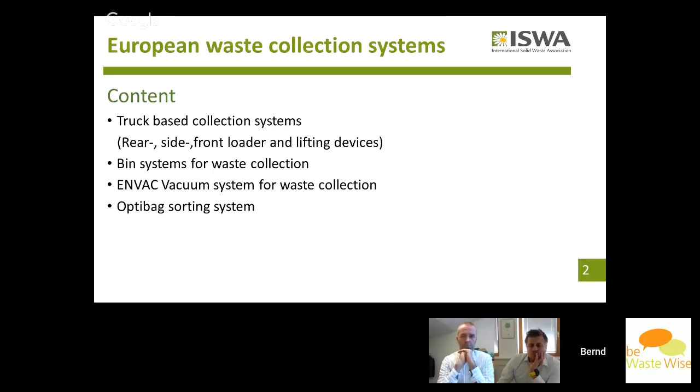First of all, I'd like to show you the most common waste collection vehicle in Europe, our working horse, our standard rear loader. In the back of the body here is a hydraulic-driven compactor installed. The compactor is able to compact the waste with a ratio up to 4:1. That means you can fill a 20 cubic meter body with up to 80 cubic meters of waste. In combination with a low or high level lifting device, which I'll show you later, you can empty all European standard bins up to 1,100 liters, even with bulky waste.

Christian will show you the bin system later on. To empty the body, you have to open the tailgate and empty it by using the pressing shield, driven by a large hydraulic cylinder.

I will show you now the most important advantages of the system from a logistic point of view. The system has a high compaction rate, up to 4:1. It is not so expensive, and most of all, it's suitable for all fractions. You can collect residual waste, bio waste, paper and plastics, and also some other fractions you want to collect. It is even suitable for bulky waste in combination with a low-level lifter.

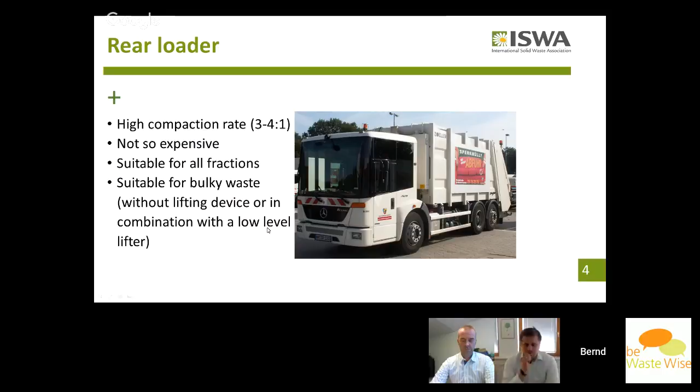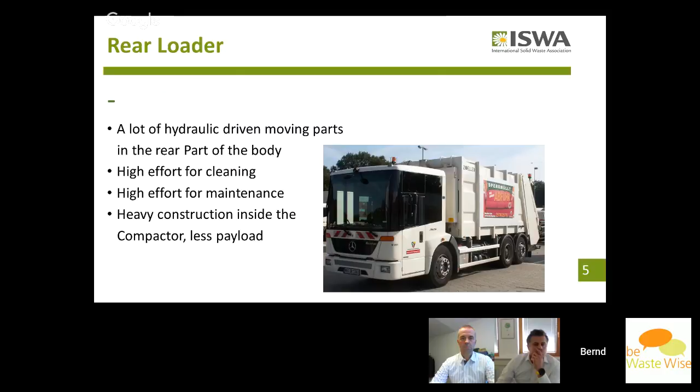I'll show you later. The disadvantage of the system is that you have a lot of hydraulic-driven moving parts in the rear part of the body. There are a lot of hidden corners you have to clean, so the effort for cleaning is very high. You have a high effort for maintenance, and you have a heavy construction inside the compactor that causes less payload.

There is a special rear loader available in Germany, the rotating drum system.

We have only one manufacturer for that in Europe because the system is patented. The body is driven by a hydraulic engine, rotating clockwise and moving the waste using inner guiding rails forward.

When the drum gets filled up, the waste comes in contact with the pressing cone at the back of the body, causing compaction. The body is excellent for bio-waste collection because the rotation of the drum means you have no problem with water and other liquids. The back of the body is easy to seal, so nothing comes out. To empty the body, you open the back and turn the body counterclockwise.

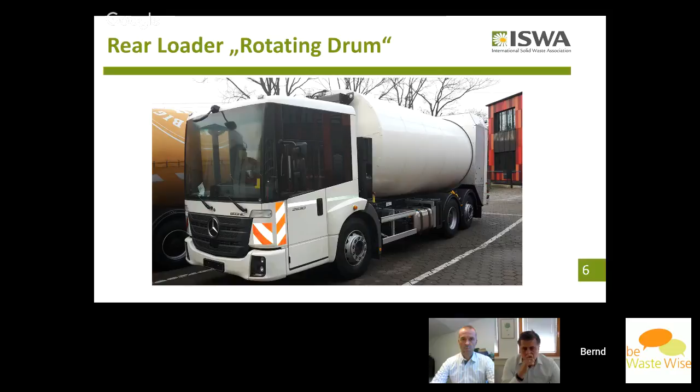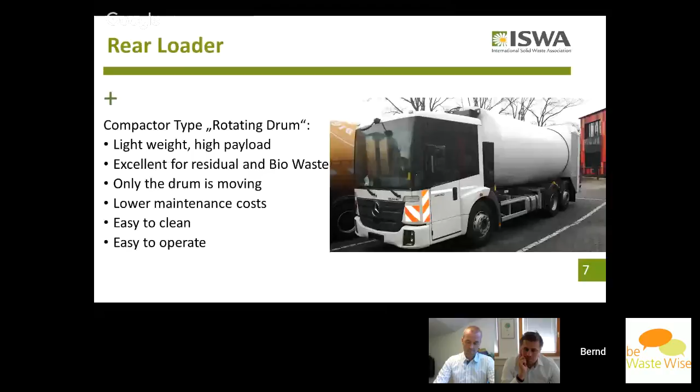The advantages of the rotating drum are that it's lightweight and therefore has a high payload. It is excellent for residual and bio-waste. Only the drum is moving, no other moving parts are in there. You have lower maintenance cost, it's easy to clean, and easy to operate.

The disadvantages are a little bit the price, it is a little more expensive. You have a lower compaction rate, up to 3:1. It is not suitable for paper collection and not suitable for packaging collection.

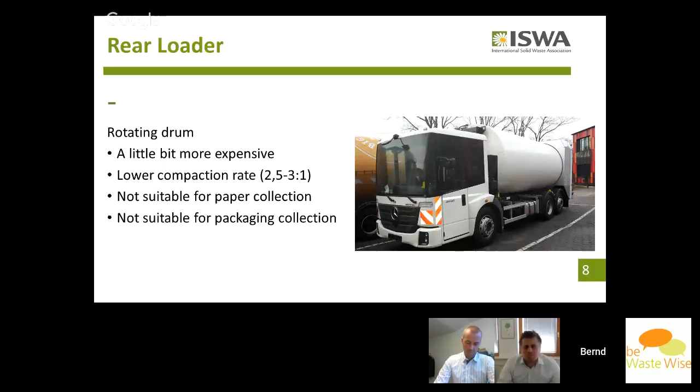One of the most important advantages of this one is, in combination with a steered rear axle, the vehicle is easy to operate in narrow areas, as you see it on the picture.

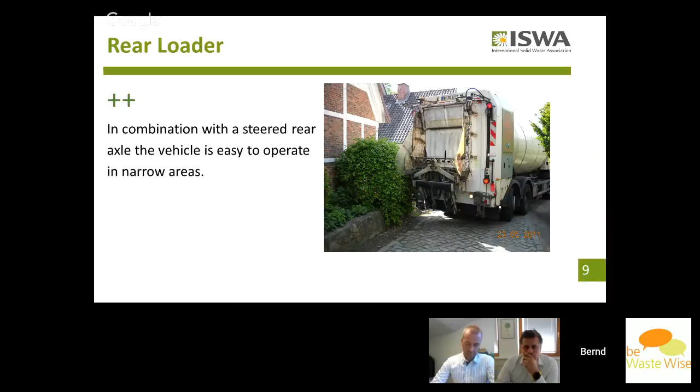For the rear loaders, we have different types of lifters available. The standard lifting device is the high-level lifter with a mounting frame according to the European norm.

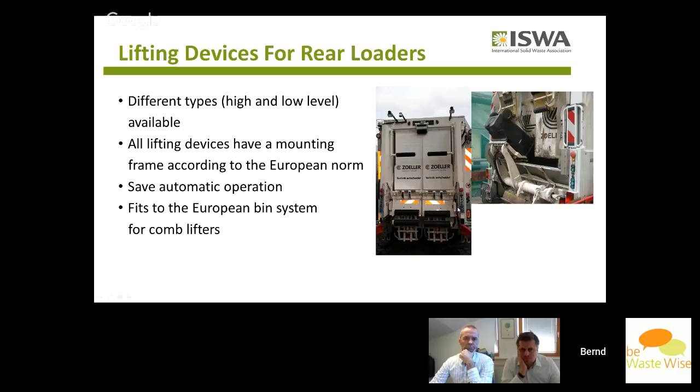The next type we're talking about is the side loader. There are different types of side loaders and lifting devices for side loaders available in Europe. We decided in our company to use the side loader with a rubber bracket here.

So we can use the lifting device for any kinds of two-wheel bins, and it doesn't matter how it is placed at the curbside. When the collection area is optimally designed, you can lift up to 190 bins per hour with such a system. It is very easy to operate.

If you want to lift four-wheel bins too, you have to choose a side loader with a comb lifter. Such a lifting device causes more weight and reduces the payload and loading speed. To empty the bin, you tip the waste into the very simple compactor at the front, located between the cab and the body. To empty the body, you open the back and tip it.

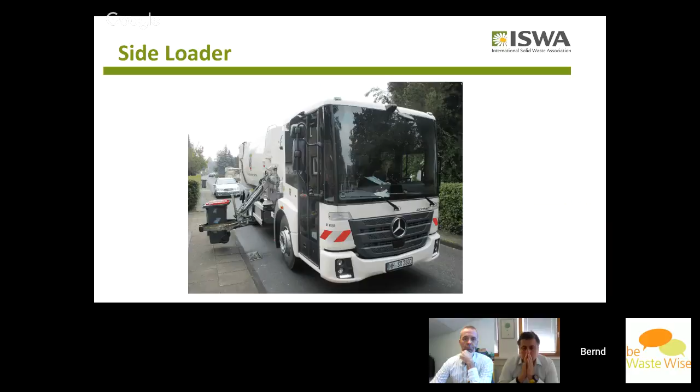The advantages of the side loader are single driver operation for curbside collection, making it very effective and fast. You have a high payload due to the lightweight body. It is suitable for residual and bio-waste collection, and it is very easy in bin handling.

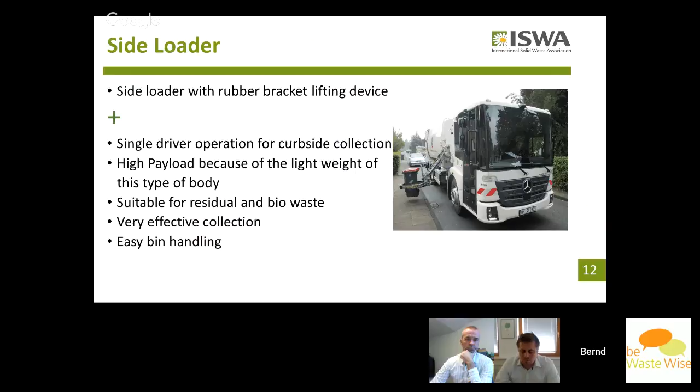The disadvantages are that the body is very expensive. You have higher costs for maintenance because you have a lot of moving parts in the lifter, and a lot of electronic devices to control the lifting device. It is not suitable for collection of paper and packaging materials.

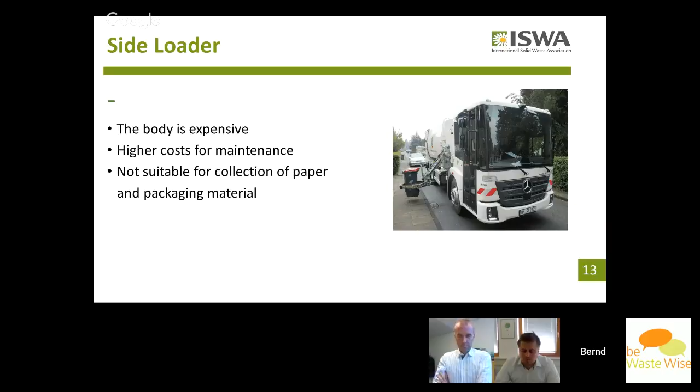On the front loader: front loaders are special trucks for pocket containers without wheels, with a volume of 3.5 up to 4.5 cubic meters according to the European standard, up to 6.5 cubic meters according to the standard of two German manufacturers.

It is normally used to dispose of commercial waste, but it's also used to collect all fractions at collection points where curbside collection is not possible. You can empty the container by using the hydraulic forklift at the front. The lifting device tips the waste into the compactor in the front of the body. Similar to the side loader, to empty the body, you have to open the back and tip it.

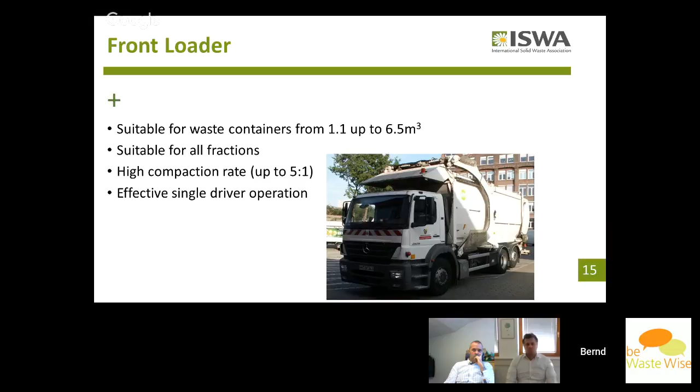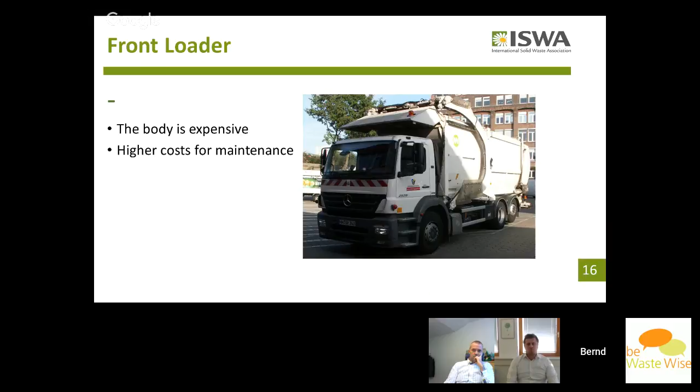The advantages of these systems are it is suitable for waste containers from 1.1 up to 6.5 cubic meters, and it is suitable for all fractions. It has a high compaction rate up to 5 to 1, and a very effective single driver operation. The disadvantages are the price. The body is very expensive, and you have a higher cost of maintenance because of the lots of moving parts in this kind of truck. That's all, thank you for your attention.

Christian, could you unmute yourself and then introduce yourself and start your presentation, please? Yeah, okay, one second. Let me share my screen. Can you see my full screen? Yeah, we can see it. Okay, welcome everyone. Hide the button there at the bottom. Again? No, actually go ahead. Please go ahead, good.

So welcome everybody, also from my side. My name is Christian Rehmer. I'm the managing director of a company within the SSI Schäfer Group and responsible for all digital solutions of SSI Schäfer for the waste industry. For those who do not know who Schäfer is, SSI Schäfer is the world's leading provider of products and systems for intra-company material flows, but also, and that's my role, waste engineering. We have in total 70 companies worldwide and more than 10 production sites. We develop innovative concepts for our customers and the relevant industries, and our target is to shape the intralogistics, but also the processes in waste management. So what I'm talking about today is bin and container systems. That's my topic.

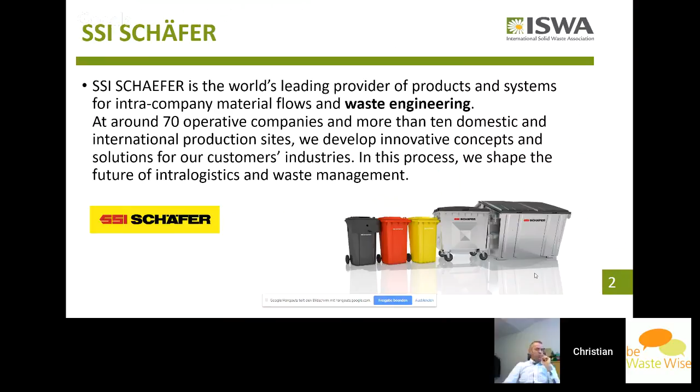First of all, I think many of you already know which type of general container systems are available on the markets. I will not go into details with regard to swapping container systems, which means I only focus on tipping systems where the container stays at the place where it's emptied. So in general, we can divide into 5 general groups of containers, starting with the very typical 2-wheel bins, which are mainly used for curbside collection, the house-to-house collection systems where the resident puts the waste into the specific wheelie bins. The same system applies to 4-wheel containers, which are available in steel or plastic.

The next system, which is quite common in Europe, or actually in Germany, are depot containers, which means these containers are placed within living areas or on the streets, curbsides, and are used as bring systems for recycling materials, for example paper, glass, etc. The 4th container system is the front-loading system, which also fits to the last truck which Bernd has just shown to us. These containers are mainly used for industrial collection systems, so industrial waste collection.

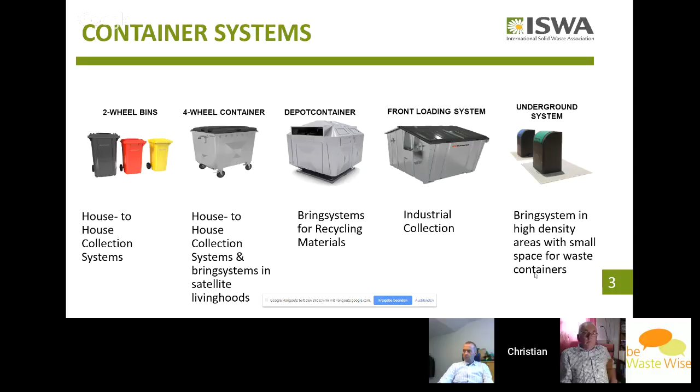The last, and probably also the most complex system, is underground systems, where you can only see a very small part of the entire container system overground, like an iceberg, and roughly 5 cubic meter containers are in the ground. These systems are mainly used for bring systems in high density areas where we have only small space for waste containers to be placed on the surface.

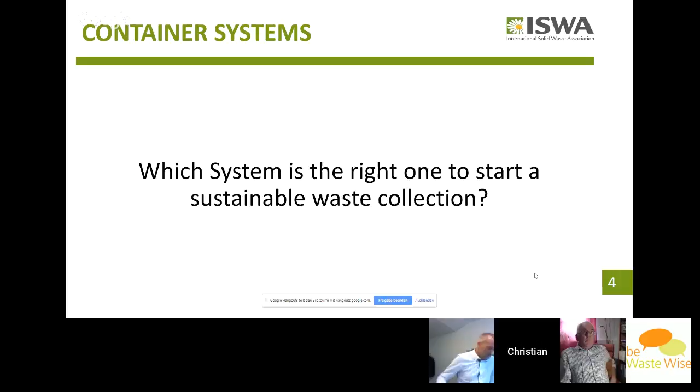So the question is, which system is the right one to start a sustainable waste collection in my area? For this, I would like to go into some sideways, having a look at the people living in cities. So some mega trends: in the 1980s, we had 39% of the world population living in cities. In 2012, it was already 51%, and it's expected that 69% of the world population in 2050 will be living in cities. Especially mega cities is a big topic, where we have, for example in 2020, more than 100 cities in China with a population of at least 1 million. This has an impact on increasing income as well.

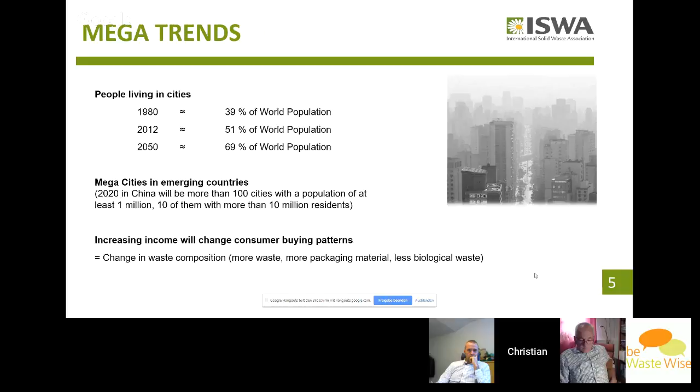So the change in waste composition - the waste composition will change in the next years, which means we have more waste, more packaging material, but less biological waste. So we have more material streams. This is causing a couple of facts, or resulting in a couple of facts. We have increasing demand for resources, and we have the demand that material recycling is absolutely necessary.

Material recycling at the end reduces CO2 emissions, and we have to be aware that waste to energy is only a one-time use of resources. So it should be material recycling, not waste to energy.

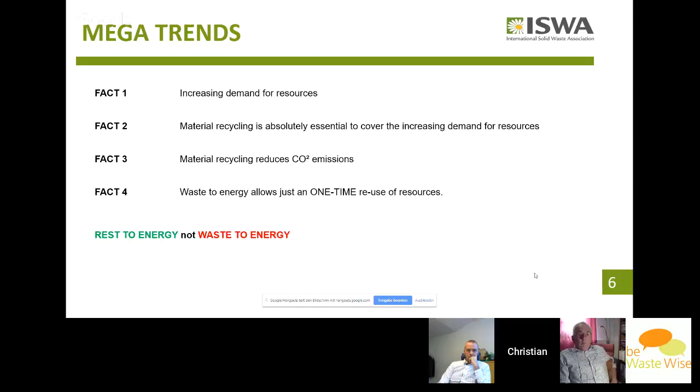This is something we have managed in Germany quite well. We have decoupled the raw material consumption from the welfare, which means the welfare is going up in emerging markets, but the environmental impact has to go down at the same time.

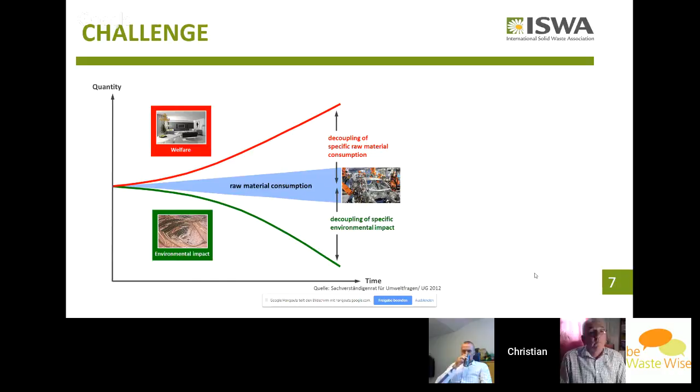What have we achieved in Germany? Having a look at the waste composition over the last years: in 1990, we had 87% of really refuse and rest waste, which has been burned or dumped into dump sites, and only 13% of recycling material.

By 2004, we had already cut the rest or refuse materials in half. At the same time, we raised the recycling quota to 58%. And in 2015, we had only 37% of material which has been burned or was rest material, and 63% of all waste had been recycled in Germany.

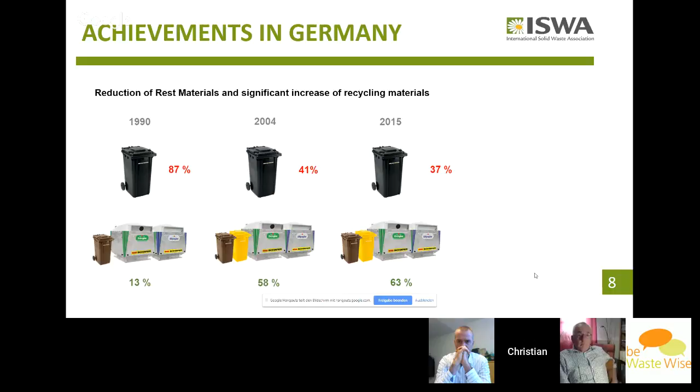This results in a couple of solutions for bin systems. I will show you two systems today: on the one hand, the 2-bin system, but also the 3-bin system, talking about the curbside collection. For example, in the 2-bin system, you have two ways for the material.

The dry waste bin, which you first sort to get recyclables out, and the rest is something which you burn, and after burning you dump, for example, ashes. For the wet waste material coming from the second bin, you use processes like fermentation or composting, and you get biogas and energy, but also compost for the farming industry.

The 3-bin system is a little bit more complex: you have only recyclables in the dry bin, the same process as before. You have only rest and refuse waste in the second bin, and you have wet waste in the third bin, which you can process at the end in the same ways as in the two-bin system.

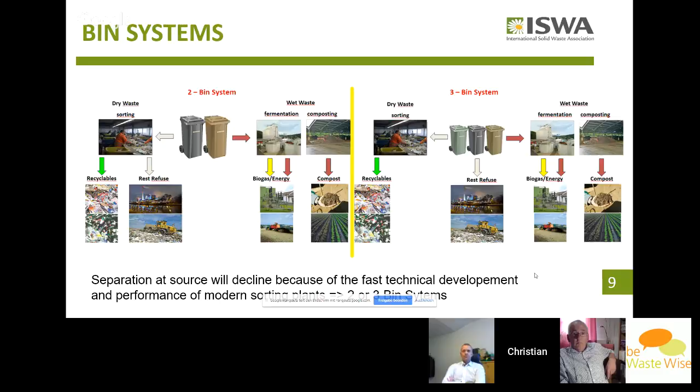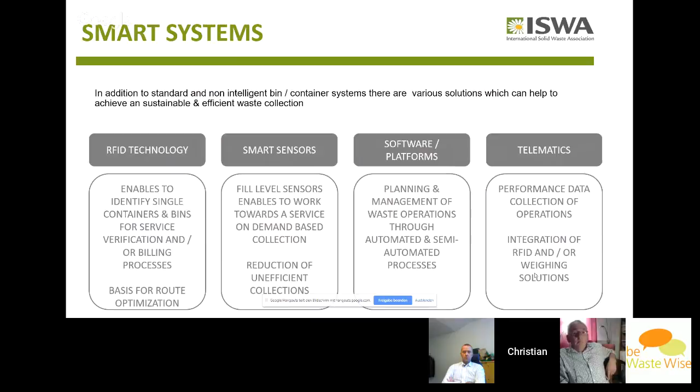Coming to surrounding systems: after you have implemented bin systems, they are not alone. You can also make a non-intelligent bin or container system intelligent through various technologies. For example, RFID technology enables identification of single containers and bins for service verification or even billing processes, and RFID can be the basis for route optimization.

Smart sensors, which go into depot containers, like fill level sensors, enable a service on-demand-based collection, and this helps reduce inefficient collection processes. Software platforms support the planning and management of waste operations through automated or semi-automated processes, enabling efficient collection and control over everything.

You need telematics on board, which gives you the performance data of the trucks. And for these trucks and telematics, you also integrate RFID and/or weighing solutions.

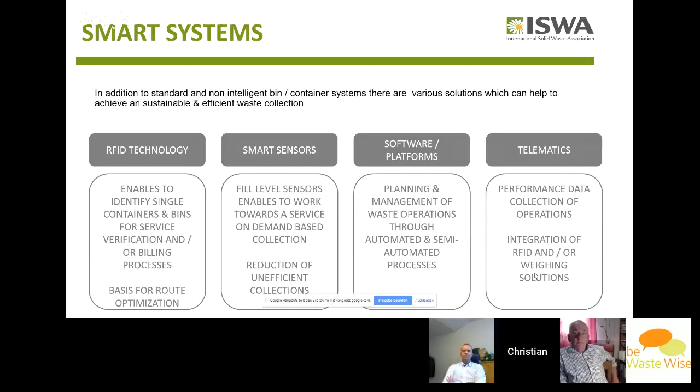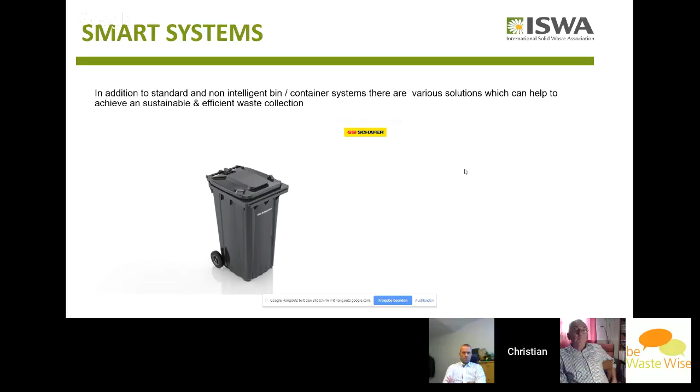Just to give you an example of how an RFID could look like, this is... it doesn't work. No, it doesn't work. Sorry, I had planned to show you a video, but it doesn't work obviously, so I'll just switch this slide, which is only showing RFID.

So how could a target scenario look like for bin and container systems? Separating everything: in the field you have depot or underground containers for recycling materials, like glass, enabled with smart technologies like fill level sensors to operate efficiently. Citizens and industry have bins with RFID and clear identification of collections.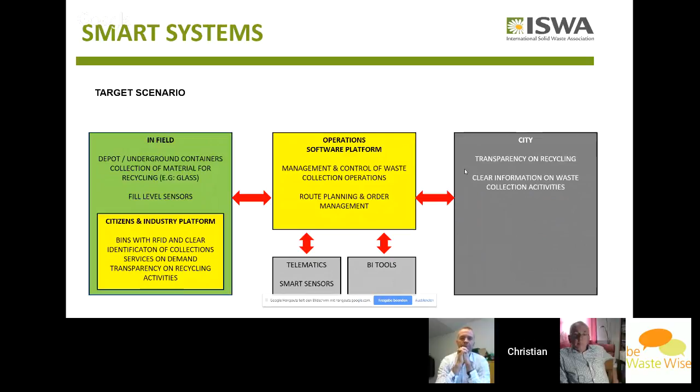In the middle, you have operations software solutions for route planning and order management. But at the end, very importantly, the city is also involved with transparency on recycling -- they have clear information on waste collection activities. This gives a whole picture of collection systems with containers.

How do I introduce sustainable container systems in three phases? First of all, from our perspective, you should do a basic analytics: how many people are living in the region you're targeting, what is the geography, what is the living density, to understand the basics of how many people, streets, cities, etc.

After this, you should do, from our perspective, a definition of which materials shall be separated. It is the waste stream definition - how do I want to split my entire waste up?

At the end, they can start with a cost and revenue stream calculation of different scenarios and also with different technologies, depending on what you want to achieve. This is really a case-to-case solution. There's no global solution for which container systems or bin systems can be used. It depends on what shall be achieved and which level of separation or segregation you are in already.

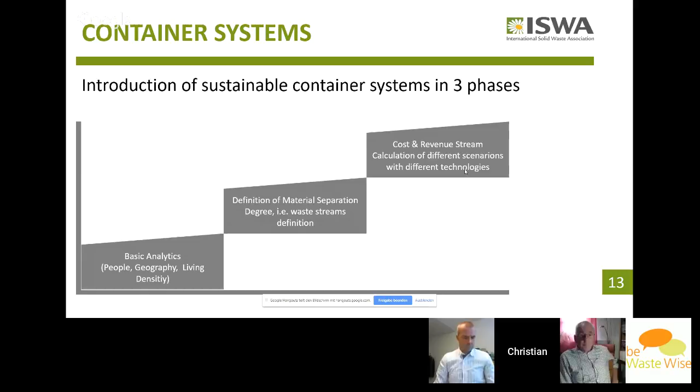I work for a company called Envac. We are located in Stockholm, Sweden, so we're a Swedish company, and we're also in the business of waste collection systems. However, our approach is slightly different to the two presentations you just have seen, because our product is based on an underground waste transport system, and I'll walk you through that technology in my slides.

Just to give you some idea of who we are - we are quite an unknown company, but we are actually world leader in these automated waste collection systems. We have offices all over the world. Main markets are, of course, the Asian markets as well as the Middle East, where a lot of city developments are happening. And I fully agree with what Christian has said.

The increase of populations in cities that will happen in the future will, of course, pose enormous demands on the waste collection systems in those areas. And we believe that our technology is quite attractive for certain areas. I don't want to say for everything, because there is no one solution that solves everything, but we do have an idea of where our product can make quite a big difference.

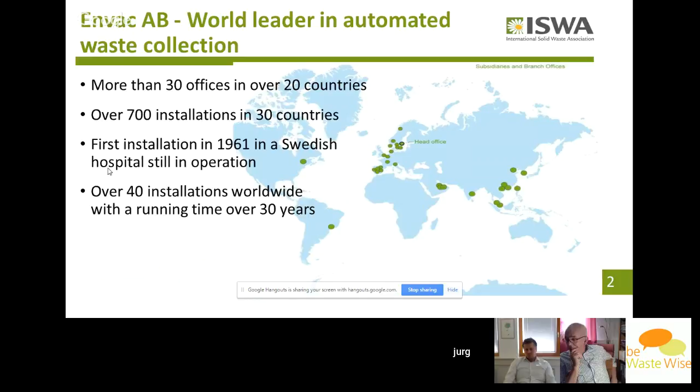Our strategic mission is we want to bring value to our customers, and you do that by delivering systems that work efficiently and cost effectively, and where every participating partner is also getting a benefit from it. That benefit may be a money-wise issue, it may be increased performance, it may be increased living quality, and we think that our technology fits quite well into these criteria.

Now, what is it all about? Basically, our idea is that users - and in this picture, an example from a residential area - take their waste to these so-called waste inlets, which is basically a tube that sticks out of the ground. Underneath this tube, you have a certain collection volume where you can put your waste in.

By sensor technology, we know how much waste is in these tubes. Whenever those are overfull, or before they get overfilled, we empty them by opening a valve at the bottom. The waste fraction falls into this large pipe in the ground. Then by evacuating this pipe system, we create a vacuum. Then we open this hatch, you get a gust of air, and this gust of air transports the waste into a centralized terminal.

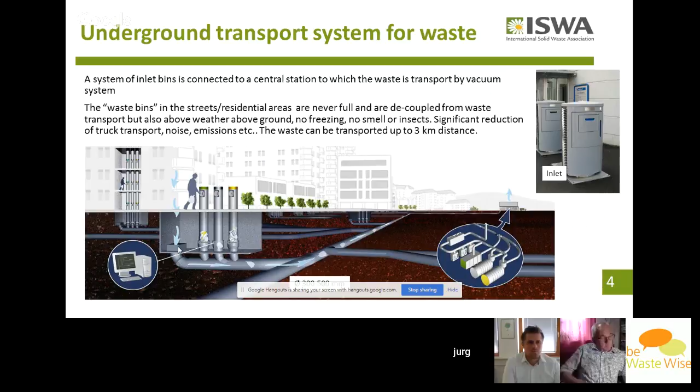I'll show you a couple of pictures of how these inlets may look like. We have all kinds of different architectural designs, always depending on what our clients, our customers would want to have in their city picture.

This big one here on the right-hand side is a relatively new design we have, which we use for small carton and packaging material. Due to Amazon, Zalando and these type of online shipping companies, the amount of packaging material found in waste streams has increased dramatically in the last two years. Carton boxes are very voluminous, they don't weigh much, but it's a very good resource to be reused. So we want to make sure we can offer technology to collect carton and small carton packaging boxes with our system.

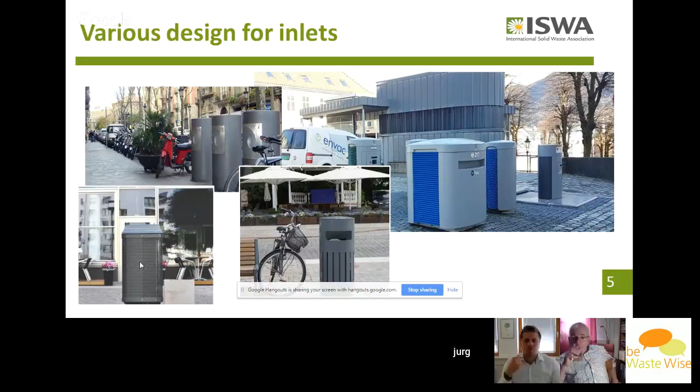You have these other types of cylinder or square systems that look pretty much like a normal waste bin you'd see in any city. The real technology of these is actually underground, and you don't see that.

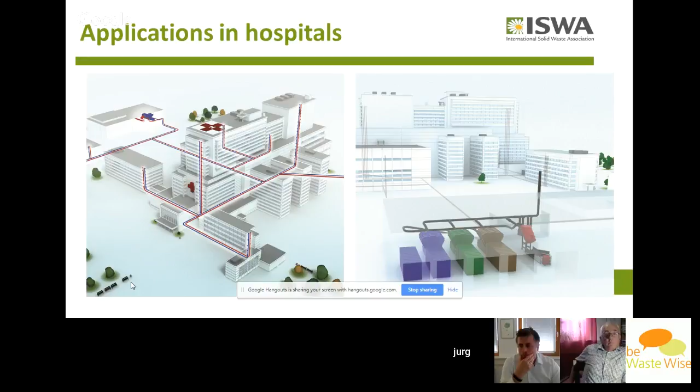One of the applications we have with this system is also a hospital area, where you of course have certain types of waste streams. It's the same application here - we have inlets in the walls or in the hallways of these hospital floors, and from there we suck the waste using the exact same vacuum technology to a centralized terminal, from where the waste can be collected and treated separately, depending on what fraction you have.

What we see as an advantage for hospitals with the Envac system is that, without it, you need space on every floor of a hospital for storing waste - intermediate storage. Now that storage room is much better used as a patient room, operation room, or whatever rooms you need in your hospital. So there's more room available for care.

You can actually have a narrower corridor - you'd need a wider corridor with a waste bin system. You also need to transport waste from these intermediate storages down normally into the basement, which would mean transporting waste and possibly contaminated material in an elevator that may also be used for other purposes. So you increase cross-contamination risk.

By removing the waste from the public area, so to say, and moving it through a vacuum system, which is a sealed pipe, you reduce this cross-contamination risk quite dramatically. You also increase, I wouldn't say the living quality of the hospital, but certainly the working quality of the staff by getting the waste out as soon as possible. We think this is a very good application for this system.

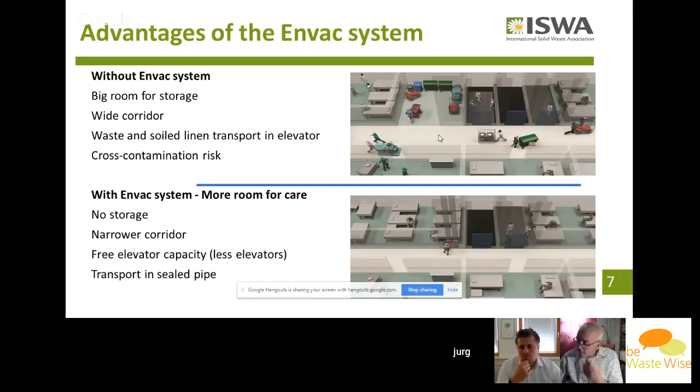Another aspect which is quite nasty and not very nice to know about is pest control in hospitals. Again, it's an area with a high infectious risk where a lot of organic material is available, which attracts pests. By reducing the amount of organic material available through an Envac system, you also reduce the access to that material by rats and similar pests.

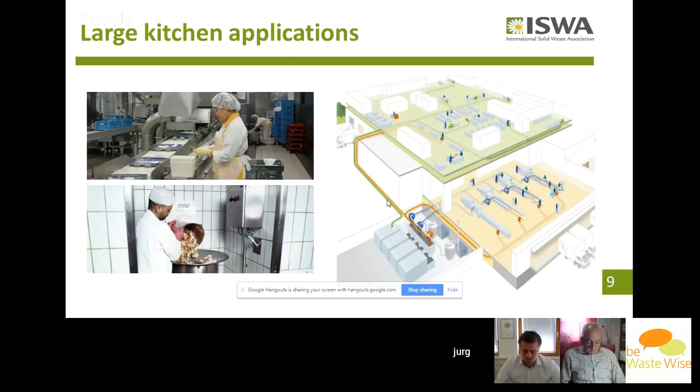Another application area we have for our system is large kitchens - that may very well be a kitchen of a big hospital, or maybe a centralized kitchen in an airport system, where you can have a set of various food waste inlets distributed all over the large kitchen, from where it would be sucked away into a centralized terminal. So we combine the available waste materials into one spot, one terminal, from where it can be transported away, which saves your workforce in transporting waste from A to B and gives you a more hygienic and cleaner working environment.

We have one demonstration project running at the moment, called the Smart Waste Collection, part of the Grow Smarter project. It is basically one waste inlet above the ground, and for this inlet you can use multiple fractions, differentiated by being put into several colored plastic bags. You can have all kinds of colors for all kinds of fractions. All go into this one inlet, fall onto a weighing system, and the color of the bag is registered as well. So you get quite a lot of nice data on how much waste fraction has been put into this inlet.

From how many households. I will show you a short video. I hope this works. Yeah, it seems to be working here. I will not torture you too long with this one.

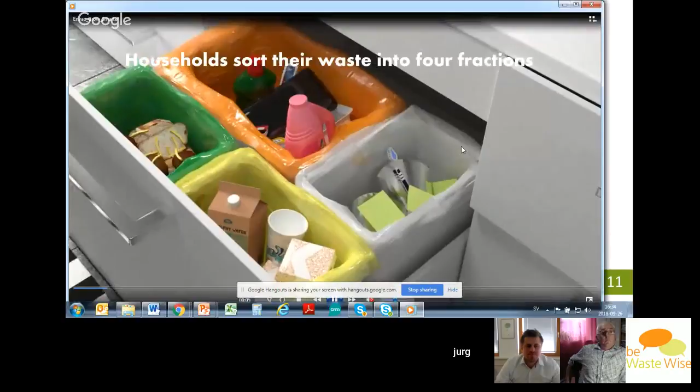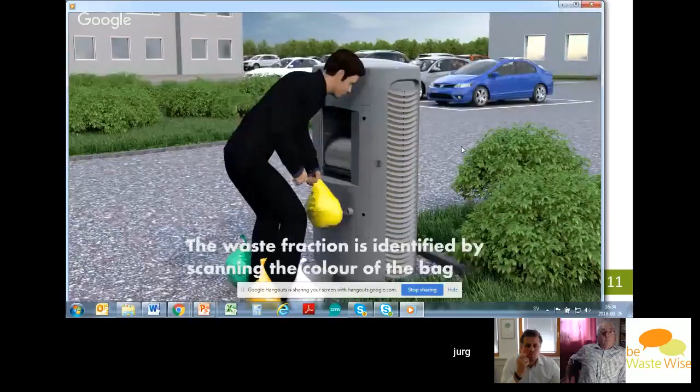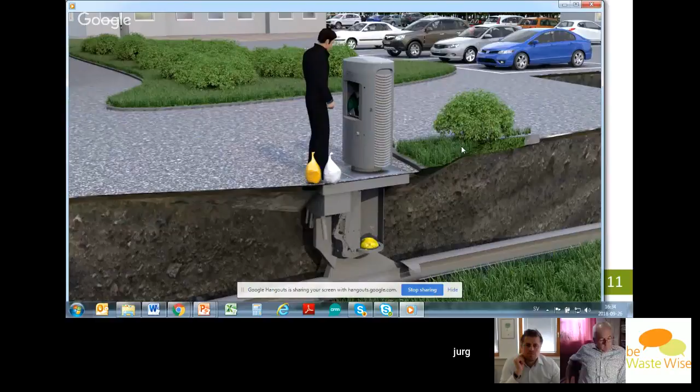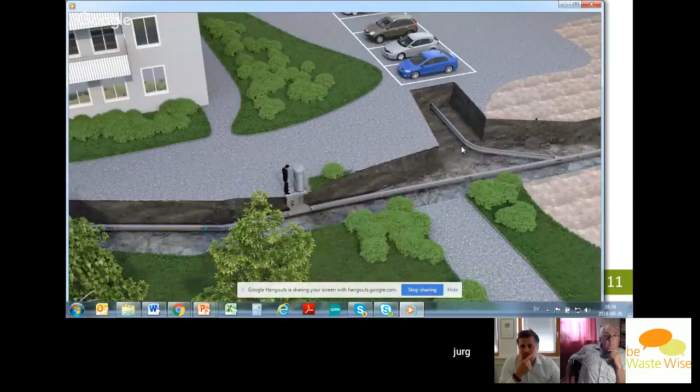The idea is that you take source separation of different waste fractions into the households, onto people's kitchen, where you have different color bags for different materials. Once those bags are full, you have an RFID tag. You go to this inlet and register yourself with the RFID. The machine scans the color of the fraction, so we know what material is in there. It is weighed, which gives you even the possibility to have a financing system based on the weight per household. It is sucked into a terminal from where the waste fractions are then picked up by a truck

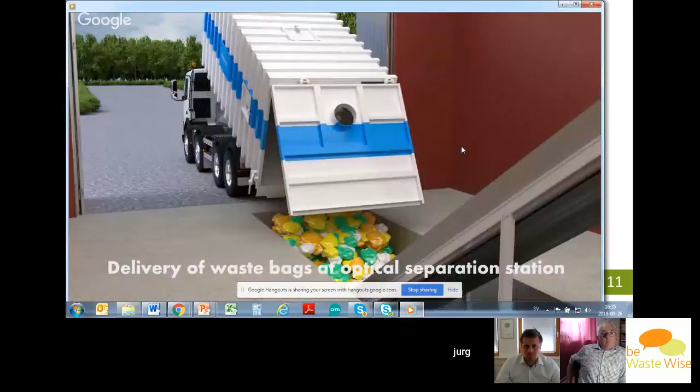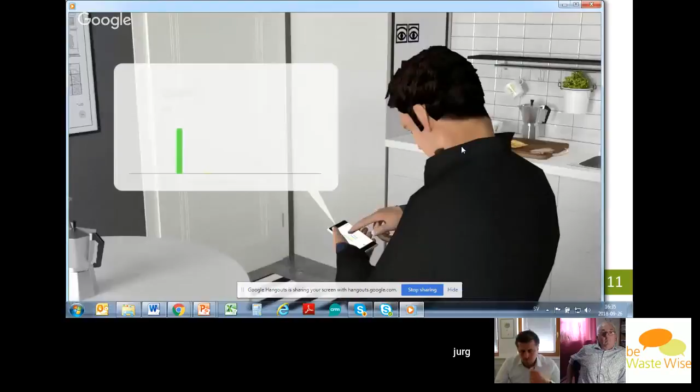and can be shipped on for further processing. In this case, as you can see here in the video, which I'll come to in the next few slides, it goes to a centralized sorting facility where that waste stream is separated according to the color of the bag. By ensuring good education and good participation of our different households, we can make sure that we get a very pure waste fraction of the respective waste material.

So in the bags where you should only have plastic packaging, we want to reduce the amount of organic waste in those bags. With this system, we can combine source separation of waste together with an underground system and give added value to households, and also to people who live in that area.

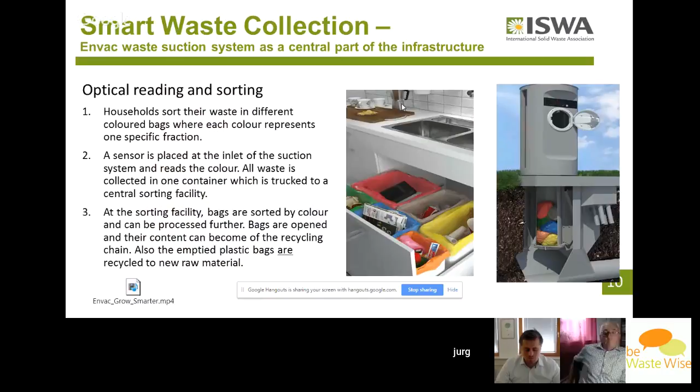This brings me now to the next slide, which is the second product of our company, basically bag and bin, as you would call it in English. The whole idea is very similar to the Grow Smarter project, that within your kitchen or household you separate the different waste fractions into different colored bags, all going into one bin.

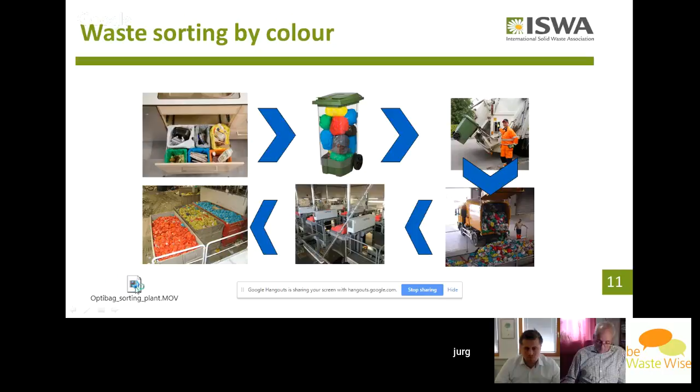They are picked up by your garbage truck, just as it is today. It goes into a centralized sorting facility where the bags are sorted by color, and you end up with containers like this that are ready for further processing. I'll show you again a short video here of how these plants actually look.

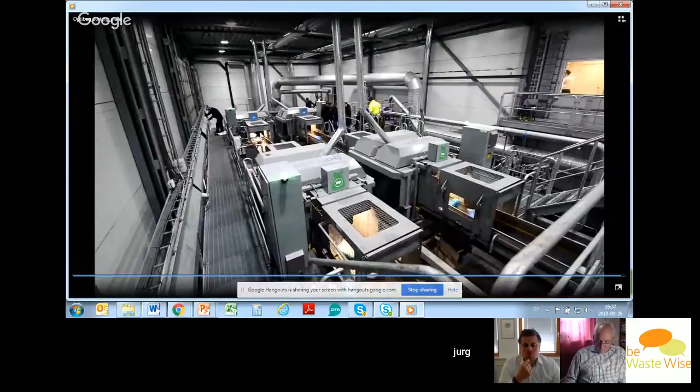This is a two-line system where you see blue bags for plastic packaging, green bags that contain food waste, and all other bags, as well as loose items, that's the trash that from this plant will go to incineration. These stations you can see are our pusher units, where we have a very simple paddle that kicks off the bag from the conveyor belt and sorts it out—in this case, sorting out the blue bags for plastic recycling.

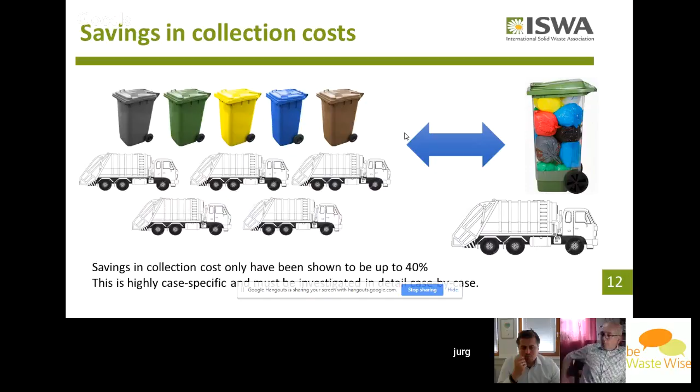What we believe with this technology, the bag and bin system, is that we obviously reduce the amount of bins that you need, and by doing that, we also believe we can reduce quite heavily the amount of trucks that need to be driving around in your area. So by using everything in one bin and then sorting it at a centralized station, you get a technology that is quite feasible to increase your source separation and increase the possibility for recycling.

It gives you good raw material without increasing the waste collection costs. We have seen this in more than 20 installations in Scandinavia, that this highly automated technology gives you a low operational cost. We've also seen that it is quite easy to implement for new customers.

You don't need to change the consumer behavior that much. What we need to tell people is that you need to separate the waste in your kitchen and put it into different bags that can be of different materials. But it's also technology that can grow with time—one of our clients just a year ago started sorting textile as a 7th fraction.

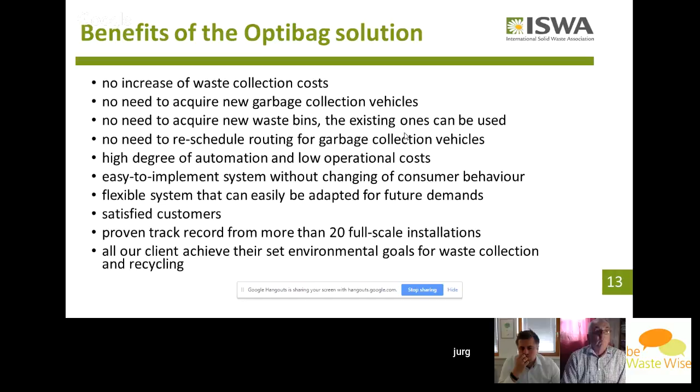And the only thing they needed to do was a little bit of reprogramming to the units to be able to see another color of the bags. And this, I believe, is my very last slide. I'd like to thank you for your attention, everybody, and I give the word back to you, Ranjit. And I'll stop sharing my screen here now.